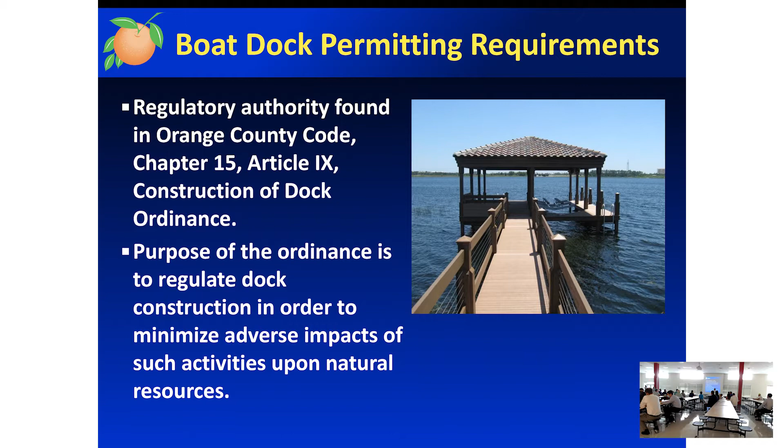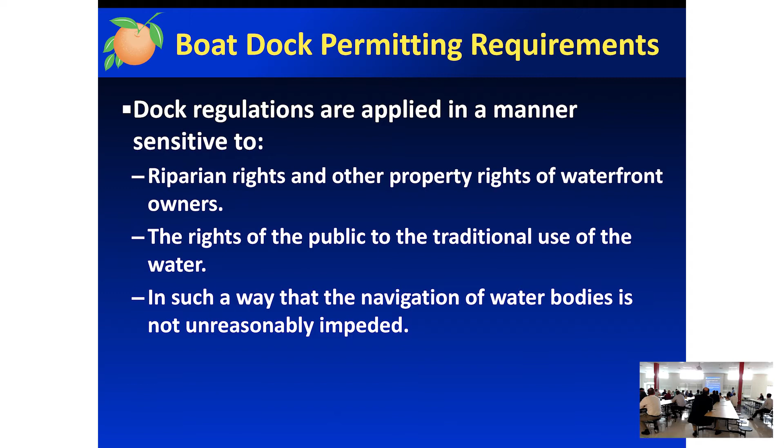We want to make sure people aren't constructing docks that have a negative permanent effect on our lakes. So all of Article 9 is full of regulations applied in a manner sensitive to riparian rights and other property rights of waterfront owners, the rights of the public to traditional use of the water, and so that navigation of water bodies is not unreasonably impeded.

And we have a few criteria - if the clicker will let me go back to it, which it might not. Well, the clicker doesn't want to let me go in reverse, but fundamentally the criteria include...

Regulations on the size of the terminal platform you're allowed to build, based on how much shoreline you own. Also side setback criteria, again based on the amount of shoreline you own - you could have either a 25 or a 10-foot setback allowed. There are restrictions on how high a dock can be built, 12 feet above the deck elevation. And the last criteria is a 1-foot minimum deck level above the normal high elevation, the normal water level of Big Sand Lake, as documented by Public Works in the lake fact sheet.

We have a 1 foot minimum above that. Lee has reported that several people might be confused, believing the dock is underwater because they were required to build it at a certain elevation and then water levels rose. But there's actually no maximum deck level required. A contractor could research historic water levels and build the deck as high as necessary to avoid flood elevation. There's no height restriction, only that it has to be 1 foot above normal height, to prevent people from running into a flooded dock under normal high water conditions.

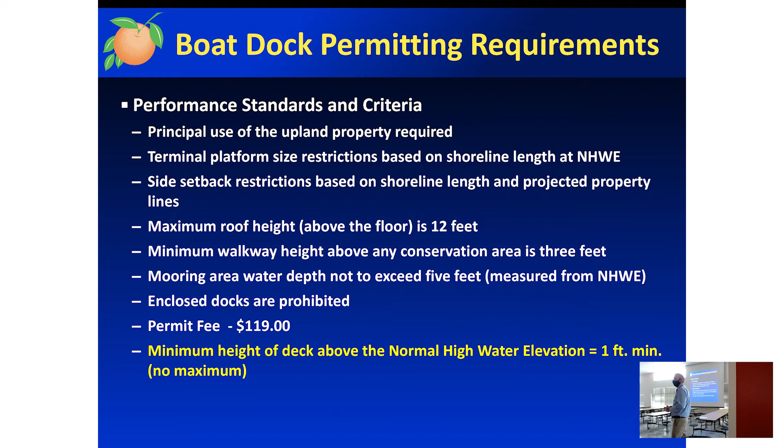This next slide talks about our processes. The first is the waiver process, which only applies to two scenarios: a side setback reduction or a terminal platform increase. For side setbacks, if you want to reduce the setback, you can provide us with a letter of no objection from the affected neighbor on that side. Then the EPO, our manager of the Environmental Protection Division, can administratively approve the waiver. Otherwise, if we don't get that letter, it goes to the Environmental Protection Commission for a hearing, and they make a recommendation to the Board of County Commissioners.

The second scenario in the waiver request process is a terminal platform exceedance. A dock can be 10 times the shoreline length for the first 75 feet of shoreline, and then 5 times for each additional linear foot, not to exceed a total maximum of 1,000 square feet. On those, there is no LONO process. Those waivers are presented to the EPC and ultimately to the BCC in all cases.

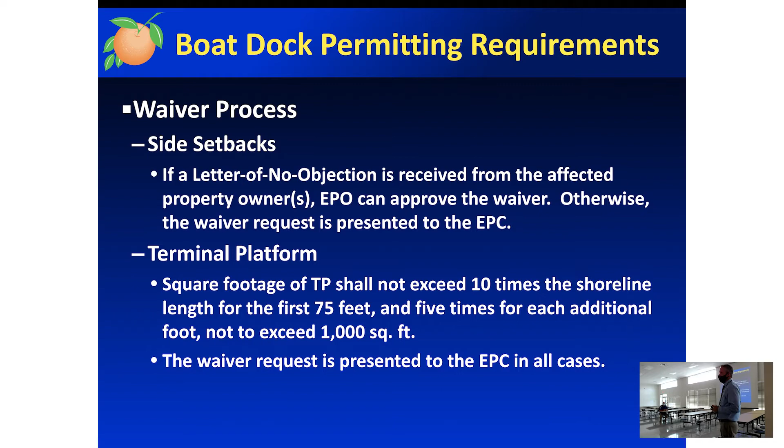The next major process in the code is a variance process, for any deviation from code other than the terminal platform size exceedance and side setback reduction already discussed. Variances have 4 specific criteria to receive approval or approval with conditions: first, the request can't be contrary to the public interest; second, owing to special conditions, compliance with the provisions would impose an unnecessary hardship on the applicant, so you must demonstrate that compliance with the code would impose a hardship; third, the hardship can't be self-imposed; and fourth, granting the variance would not be contrary to the intent and purpose of Article 9.

All variance requests go to the EPC first for a recommendation, then on to the BCC, typically on consent agenda. However, there are some special EPO approvals where they can skip that process, either for ADA (Americans with Disabilities Act) reasons, or sometimes where the variance would actually promote more ecological benefit than compliance with the code—in those cases, the EPO can also approve.

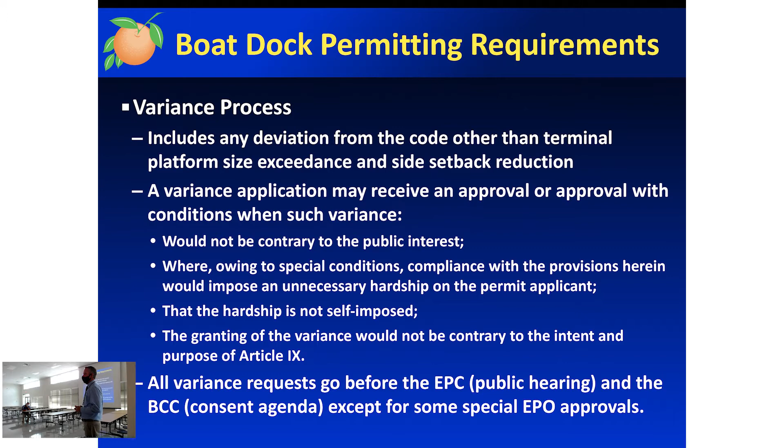Well, no, it doesn't want to go forward either. Let me try, I'm going to try moving positions. There we go.

So this is a floating dock recommendation letter. Since 2016, around when EPD started receiving an increased volume of complaints about docks being underwater, we developed this template letter in our system. Every time a dock application came in for the past 5 years, for Big Sand Lake specifically, we've sent this letter to the applicant and copied their dock contractor, explaining that Big Sand Lake experiences a wide fluctuation in water levels, anywhere from 10 feet below normal high to 10 feet above normal high, and therefore we recommend considering a floating dock design. For the past 5 years, people have gotten that letter.

So if you, your friends, or a neighbor are interested in the status of a boat dock permit, or one issued anytime since 2011 when we built our database, you can Google and go to the Orange County Fast Track Permit Portal. You can search by Big Sand Lake, by street address, or by owner name, and look up any boat dock permit you're interested in, even pending applications still being reviewed.

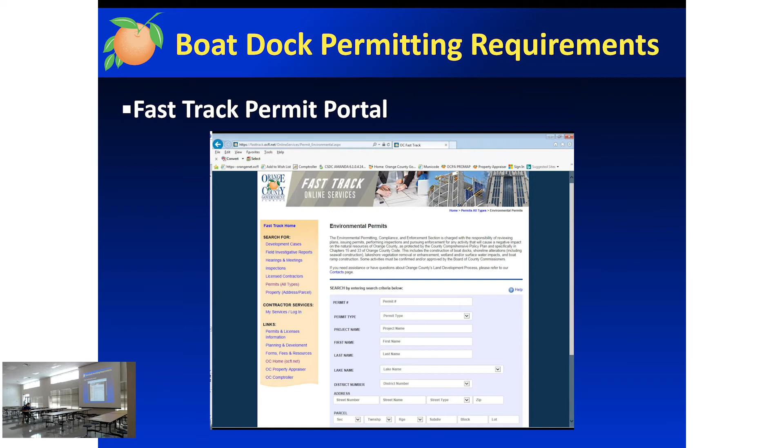The last section on boat docks is that we're currently updating the ordinance. Article 9 was adopted in 1988 and last revised in 2004, so there's a lot of antiquated language we've learned needs addressing through citizen and contractor feedback. We've tried bringing the ordinance forward before, but it sometimes becomes political. Now we have an effort we're very far along with.

The goals of this update include maintaining environmental protections - we don't want to decrease protection of water bodies - decreasing the time it takes to review and obtain a permit, increasing the maximum allowed dock dimensions required by certain portions of the code, and eliminating the waiver process while making it more difficult to obtain a variance.

We're making it easier and eliminating the waiver process if you want to increase your dock over what current code allows, up to a maximum of 1,500 square feet and up to 15 times your linear shoreline length - that process is going to get much easier. What we've built into the draft is that most requests will be captured in the streamlined process, and only the oddballs that are really large would need to go through the variance process, with criteria that are a little more difficult to meet.

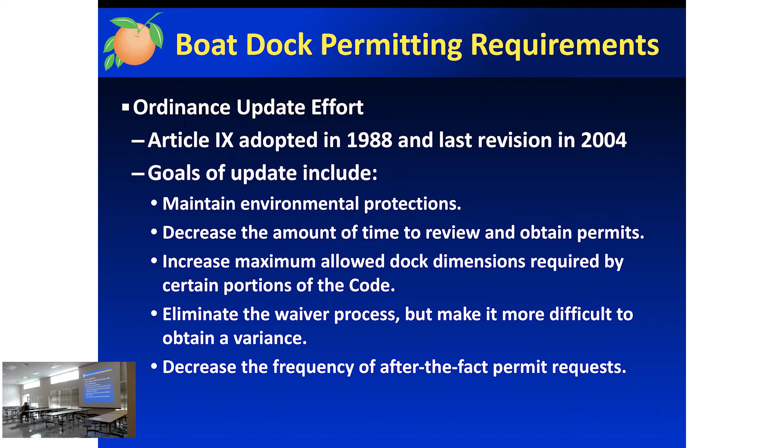The timeline for this effort: we already held two stakeholder meetings on September 15th, one in the early afternoon and one in the evening, and got great feedback from contractors who attended. Next month and in November we'll brief the mayor and commissioners on the ordinance. In January and February we'll brief advisory boards including the Environmental Protection Commission, the Development Advisory Board, and the Land Planning Agency. In March and April we're looking at a BCC work session, and hopefully May or sooner is the adoption hearing for the ordinance.

If you're interested in reading it, this presentation can be made available to you, and there's a link to the draft ordinance on the county calendar. If you have any comments, whether you've read the ordinance or not, you can submit them by email to wetlandpermitting@ocfl.net.

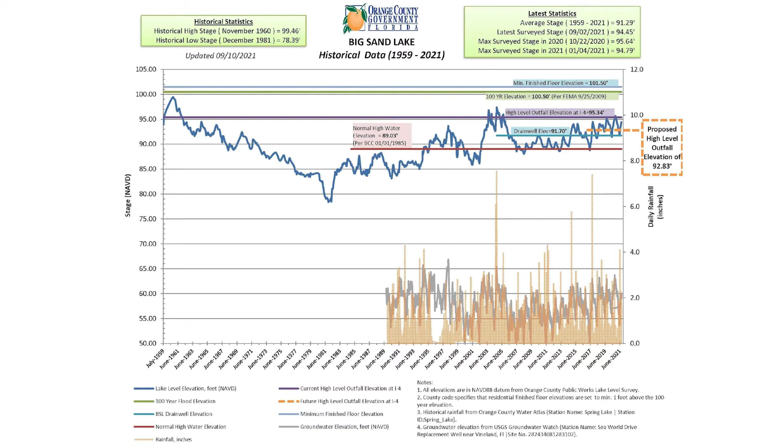I just say that to illustrate that the lake behaves as a landlocked system, with those very large fluctuations.

One thing I also want to point out is although these peaks were quite high, probably higher than most people would like, they were still well below the minimum finished floor elevation of 101.5. None of the peak stages in the last 20 years has been close to anyone's minimum finished floor elevation. Also in 2003, the county was able to work with FDOT and get a drain well installed at elevation 91.7.

And then in 2015, they were able to get another drain well installed also at elevation 91.7. What the drain wells do is they take water into a casing and send it down into the aquifer. It's a 12-inch diameter pipe that goes down, and it provides some volume recovery for the lake to help reduce those higher stages that you see in the lake.

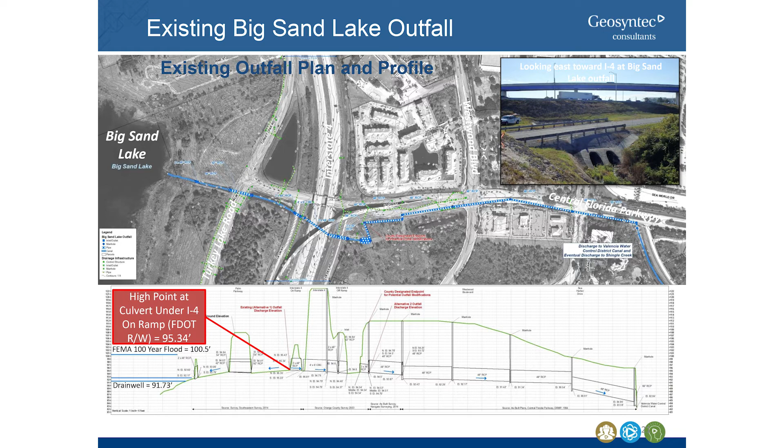If Big Sand Lake reaches 95.34 feet, it starts to overtop this high point in the system and drain east through the system and out towards the Valencia Water Control District. So this is the existing condition, existing outfall of the lake. This is a zoomed in view of that outfall. There's Turkey Lake Road, here's I-4. This is the profile of the pipes and the ditches.

So what is the proposed system? The proposed system would replace the pipes and ditches from Big Sand Lake to Central Florida Parkway with an enclosed storm sewer network. That system would continue to receive runoff from Turkey Lake Road and I-4 as the current system does. But the big benefit for Big Sand Lake is the high point in this system would be 92.83 feet, which is 2.51 feet lower than the current outfall.

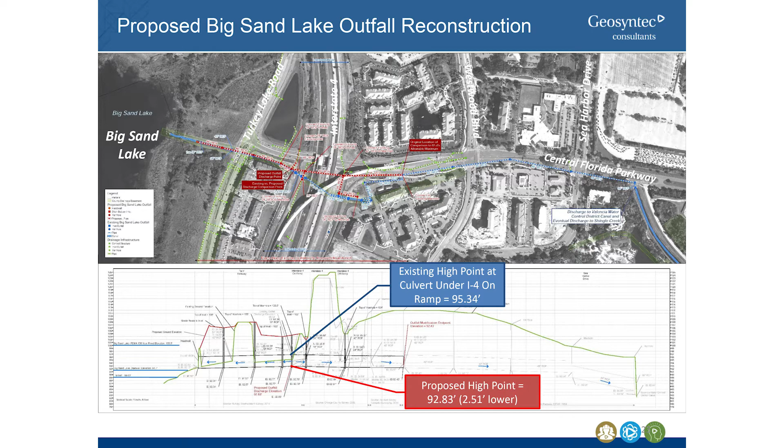This is a zoomed in view of that profile, the proposed profile versus the existing one. So you have a 2.5 foot lower system.

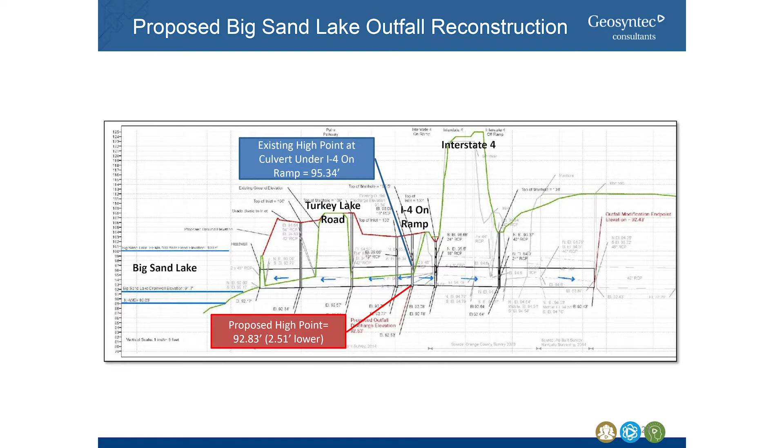Going back to the historical map, I'm going to go to the 20-year one. Because of the county's proactive efforts and coordination with the DOT, this system has already been designed and permitted through the St. Johns River Water Management District and the Valencia Water Control District. So the next step is just construction, and it will be constructed as part of the DOT's Beyond the Ultimate project when that is constructed.

That is for DOT to divulge that information later. I believe so, yes. What is it about? If you'll let me finish, I'm sure they'll discuss it. I've been waiting a number of years for this. Is it next week? Is it 2022 or 2023? We're looking at 2022, sir. There you go, 2022. I'm from DOT. Okay, there you go, okay, so 2022.

Another question you may have is how much additional flow or benefit will this outfall provide? For comparison, the drain wells, when flowing at their maximum rate, can handle about 1,300 gallons per minute leaving the lake down the well. The proposed outfall, when flowing full, will provide 10,000 gallons per minute of additional outflow, which is the equivalent of about seven times the existing drain wells, or adding about 14 more drain wells to the lake.

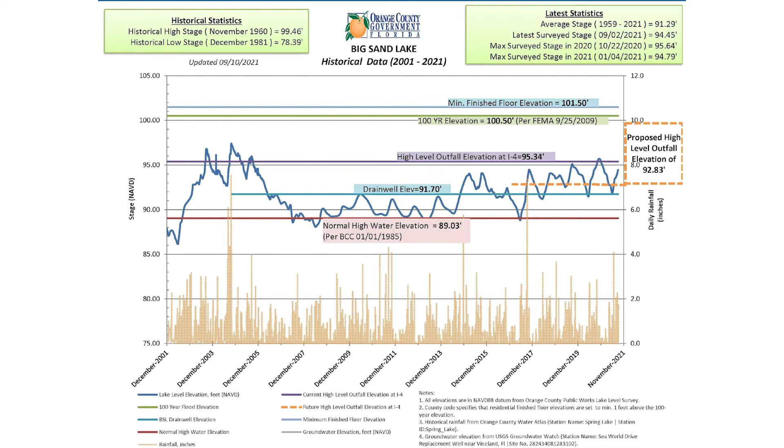And with that, I think I'll pass the baton over to the DOT. Is it this one? This is the laser pointer, and this is the next. Okay, thank you. Oh, I'm sorry? Oh, they've got a switch. Oh, okay, there you go. Yeah, oh yeah, okay, gotcha.

Hello everyone, my name is Su Hao. I'm from... I'm sorry? Louder. Okay, I'm trying to be as loud as I can. I don't have a loud voice.

My name is Su Hao, and I'm from FDOT. I'm here to give you an update on I-4 Beyond the Ultimate and the projects that we have coming up going to construction in this area in the near future.

I can pull it from here. Or... Oh, there we go, okay.

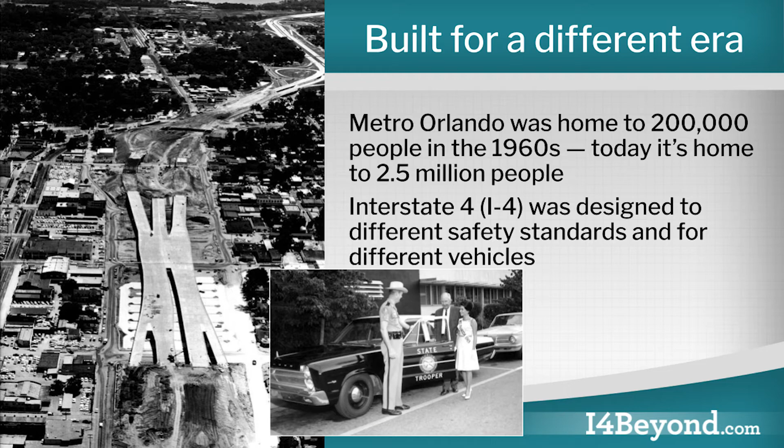So why are we reconstructing I-4? Well, the original I-4 was built back in the 1960s, and since then there has been a lot of development. Today it's home to more than 2.5 million people. Since then, vehicle and safety standards have also substantially changed. That's why we've had to rebuild I-4 several times throughout its life, and we have the I-4 Ultimate project that's going on in construction right now.

The goals of the I-4 Beyond the Ultimate project are to increase safety, increase mobility and ease congestion, increase connectivity among Central Florida communities, and support the region's economy and lifestyle long into the future.

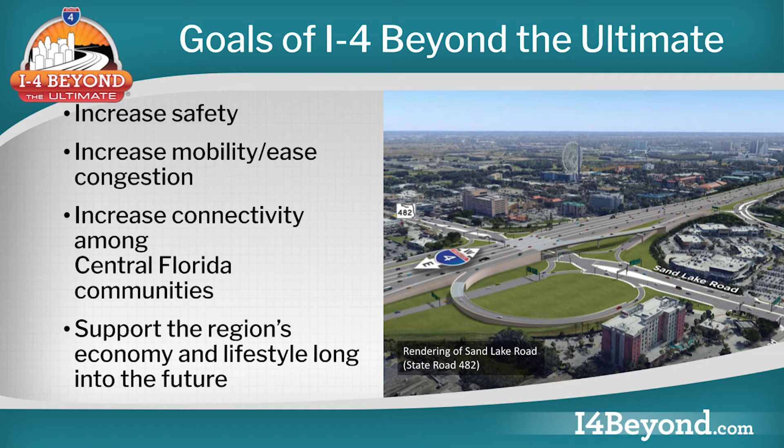I'm gonna go back. Is there a way to go back? At least we can get to go back earlier. Okay, so anyway, I'll continue.

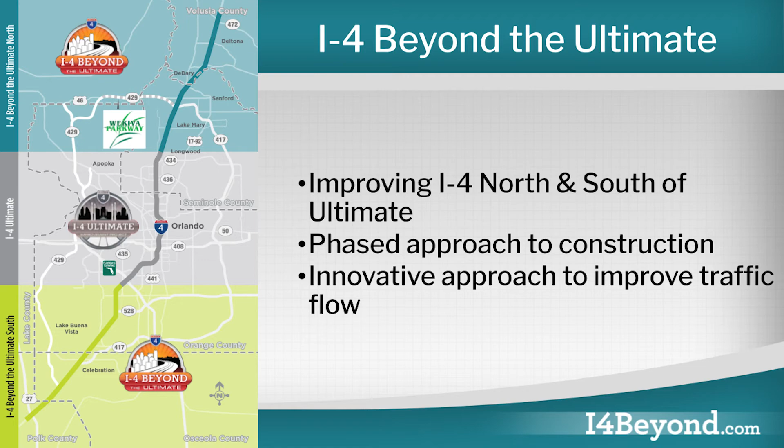For the I-4 Beyond the Ultimate project, we are extending that from the I-4 Ultimate limits. What we are doing is looking to prioritize critical areas that have the highest amount of needs. With that in mind, we are looking to construct some critical projects to address the areas that are needed the most. Here are some projects that we have going to construction or in construction right now.

The first one is the I-4 at Champions Gate project down in Osceola County. As you might know, that area gets backed up a lot, so that just went into construction this past summer. It'll be converting the existing interchange into a diverging diamond interchange, which I'll get to in a moment.

The other two projects we have are the I-4 at Daryl Carter Parkway project and the I-4 at Sand Lake Road project. Both of these projects will be converting the existing interchange or overpass into a diverging diamond, and they will be going to construction in the spring and summer of 2022.

For the Sand Lake project, as mentioned previously, we are converting that into a diverging diamond. A diverging diamond interchange has several advantages over a traditional type of interchange, the most important of which is that it removes left turns across oncoming traffic. That improves safety and cuts down on the number of traffic signal phases, which lessens the amount of time vehicles need to spend waiting at a signal.

Another key feature of the Sand Lake Road project is the removal of the left turn from westbound Sand Lake Road to Turkey Lake Road. When I was driving here today, I was pretty backed up getting off the exit from westbound I-4 to Sand Lake Road, and I'm sure a lot of people here have witnessed the same thing. That exit gets a lot of traffic because vehicles are trying to turn left onto Turkey Lake Road, and that turn gets backed up a lot.

So what we are doing is that we are putting in... this will work for me. Is there a way to control this? Okay.

So what we're doing is putting in this loop ramp. This loop ramp creates direct access for vehicles traveling on westbound Sand Lake Road to get to Turkey Lake Road, and it also gives direct access from I-4 to Turkey Lake Road. That takes a lot of vehicles who would typically use the Sand Lake Road exit and gives them their own exit onto Turkey Lake Road, diverting traffic away from this exit and hopefully easing congestion on the I-4 main line as well.

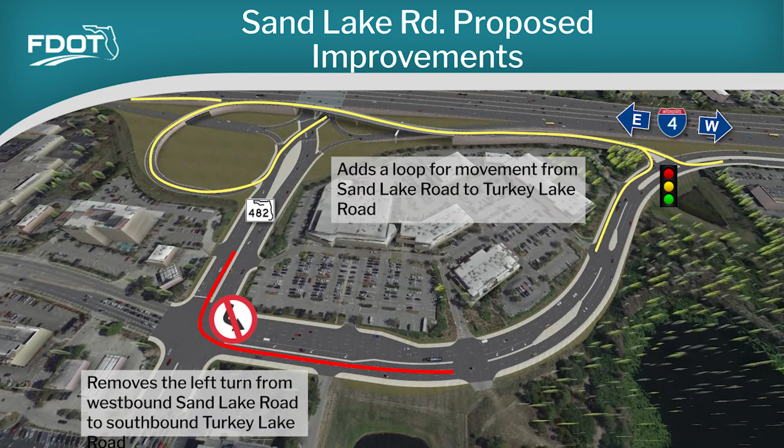Oh, okay. Yeah. Would this work better? Or do you want to click?

Okay, yeah, thank you. Quick question, how do you merge those two traffic flows, the I-4 and people that take the loop ramp?

Great question. There will be very good signage out there, and we will set up the lanes so that the lanes coming off of I-4 will have their own separate lane as it approaches the loop ramp.

As mentioned previously, we are looking to prioritize critical areas utilizing the funding that may become available. As part of that, the I-4 Ultimate Express lanes are expected to open by early 2022. If funding becomes available, we want to look at possibly extending the express lanes south towards Disney, and we were looking at various options like managed lanes, truck-only lanes, HOV lanes, that sort of thing.

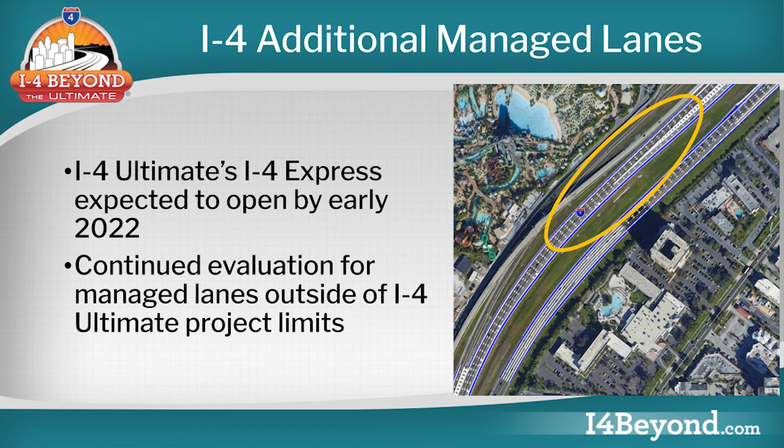The I-4 Daryl Carter Parkway project is going to convert the existing overpass into a diverging diamond interchange. Three of the legs of the interchange will be built with this project under construction in 2022, with the fourth leg being constructed at a later time when funding becomes available.

As part of this project, as Mr. Amstad mentioned, we are also going to be building the Big Sand Lake outfall on behalf of Orange County. The county did design the project, so all FDOT is doing is taking over the construction of that project and doing it for Orange County.

Another project we have is the Champions Gate interchange project. For that one, much of the same: we're converting the existing interchange into a diverging diamond. Osceola County is the one that designed this project, and we are overseeing its construction.

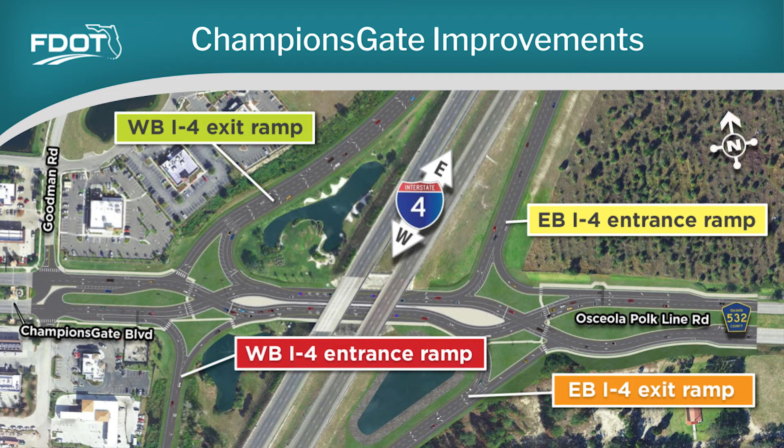As part of this project, we are also going to be widening the ramps to the interchange to help create more storage for vehicles and help ease traffic flow.

Another project we have is a more minor one: we're going to be adding eastbound and westbound auxiliary lanes on I-4 from Champions Gate to State Road 429, adding an additional lane to help with traffic flow down there. We're also going to be milling and resurfacing I-4 from the Polk Osceola County line to State Road 417.

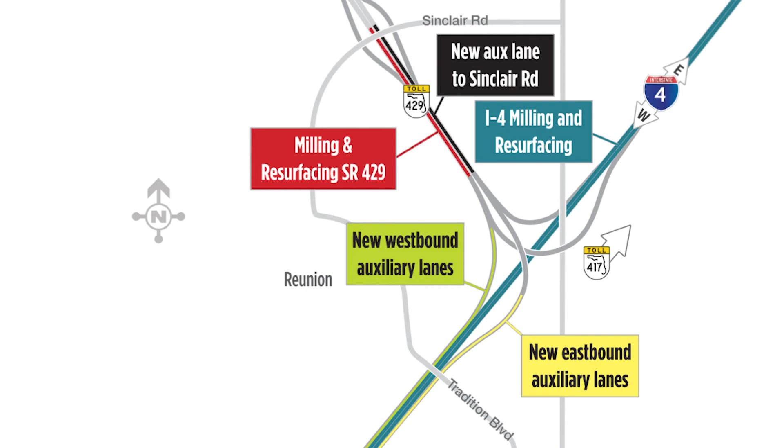So now I'm going to talk more about diverging diamond interchanges. As mentioned previously, the main advantage is that it eliminates left turns across oncoming traffic. It does that by shifting traffic to the left side of the road as it goes through the interchange. That allows vehicles looking to get onto the interstate to make a left turn directly without having to go through a traffic signal, which reduces the number of traffic signal phases and improves congestion for the whole interchange.

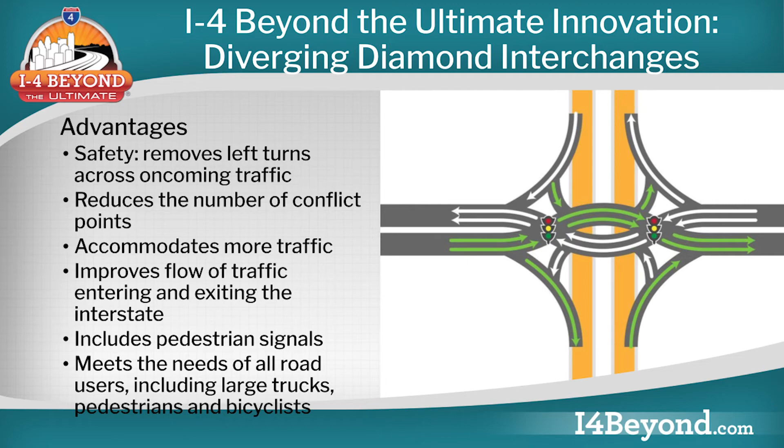This shows how a diverging diamond interchange works. I'll go through them one by one.

To go through an interchange, you basically just follow the path of the lane. On the left side of the screen, there will be a traffic signal. When the signal turns green, you just follow the lane through the interchange, and it'll cross you over to the left side of the road. Then you keep going, and there will be another traffic signal before it crosses back over to the right side of the road.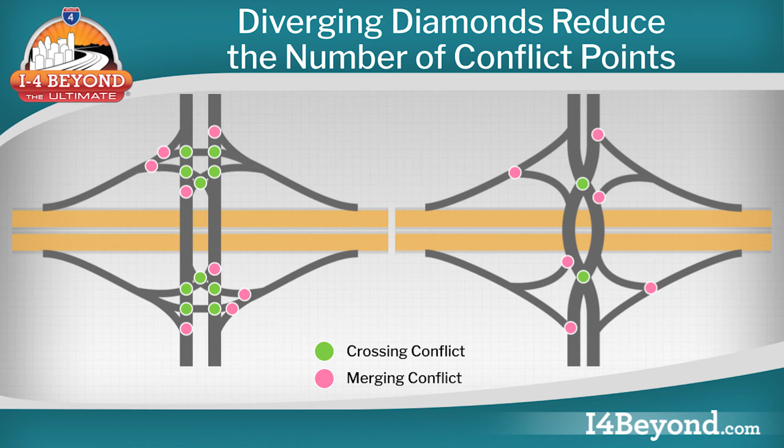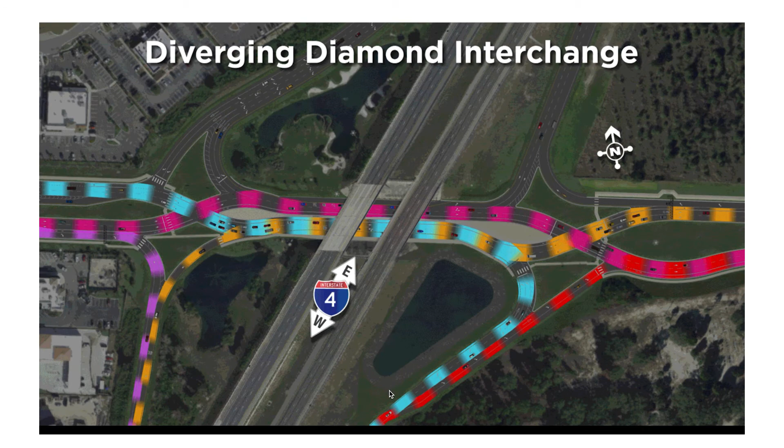So then how do you take a left to get onto the interstate? That's where the diverging diamond interchange advantage comes in. First you go straight through the traffic signal, and the lane will pass you to the left side of the road. Then, before crossing to the end of the interchange, you simply take a left onto the on-ramp.

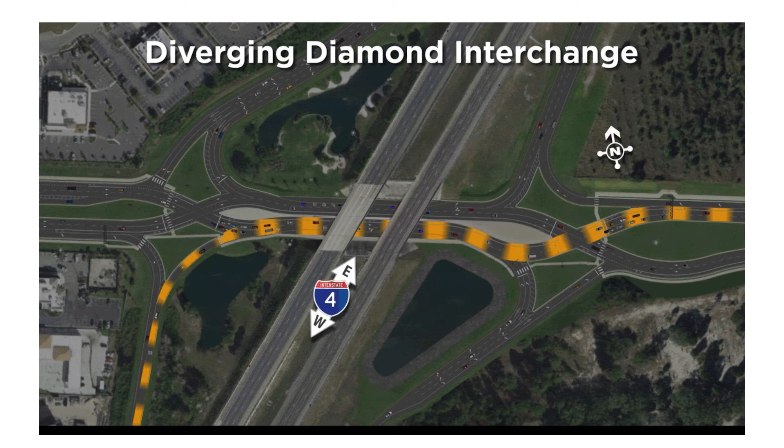If you're trying to take a left onto the side street coming off the interchange, you just stay in the left side of the lane, and when the traffic is free and it allows, you take a left turn, and that will cross you back to the right side of the road.

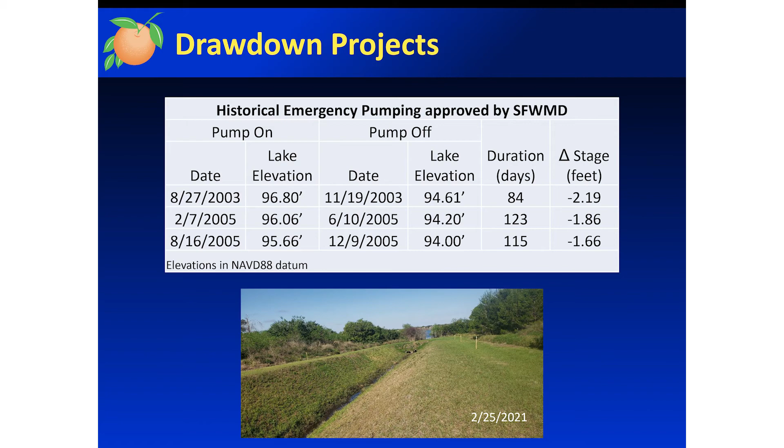I work for Orange County Environmental Protection Division, and I'll be discussing some of the drawdown projects that have been done in the past and one that we're currently working on. There have been drawdowns on the lake: one was done in 2003, and then 2 pumping events were done in 2005. This shows information about when the pumps were turned on and off, the dates, lake elevation, duration, and the change in stage. The photo at the bottom is what the outfall currently looks like now.

From June 2002 to August 2003, Big Sand Lake water level rose 8.03 feet. On August 9th, 2003, the berm between Little Sand Lake and Big Sand Lake washed out, and the elevation in Little Sand Lake was 5.74 feet higher than Big Sand Lake. In addition, an outfall pipe under FDOT jurisdiction was clogged. Based on these factors, the Water Management District issued an order on August 21st, 2003 for the drawdown, and the pumping lowered the lake from 96.80 to 94.61 feet.

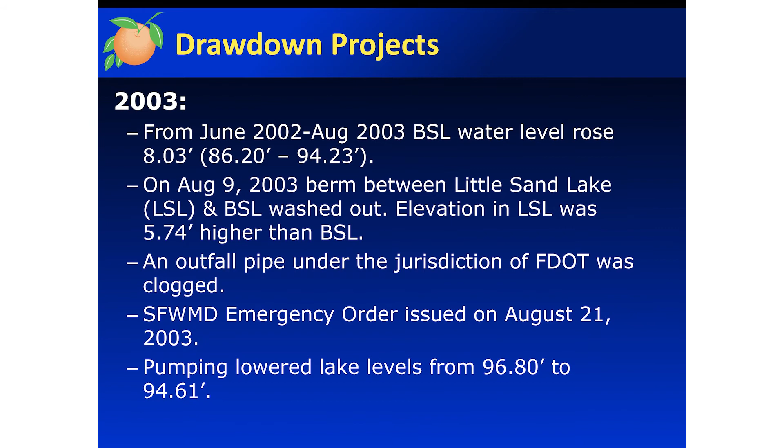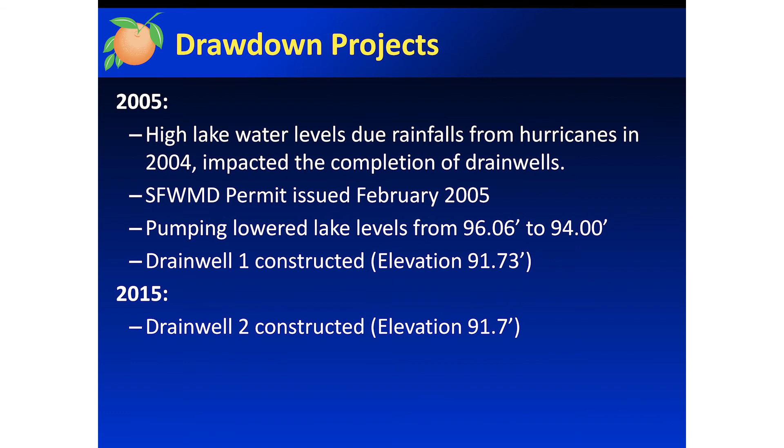In 2005, high water levels due to hurricanes in 2004 impacted the completion of drain wells that Tom mentioned before. The Water Management District issued a permit in February 2005, and the water was lowered from 96.06 feet to 94 feet, which facilitated completion of the drain wells. The first one in 2005 at an elevation of 91.73 feet, and then the next one was done 10 years later in 2015 at 91.7 feet.

On September 30th, 2020, the Big Sand Lake Advisory Board approved up to $500,000 of MSTU funds to pump Big Sand Lake. For the current scope, we had Geosyntec perform an analysis, and based on their design, 2 pumps with a combined discharge of 22.2 cubic feet per second would pump 7 days a week, 24 hours a day, to a maximum lake elevation of 92.83. The conditions would be monitored daily.

However, the current status is that the owner of the property where we would need to stage the pumps and fuel tanks, we're awaiting approval from them for a right of entry. We started that process in February of 2021.

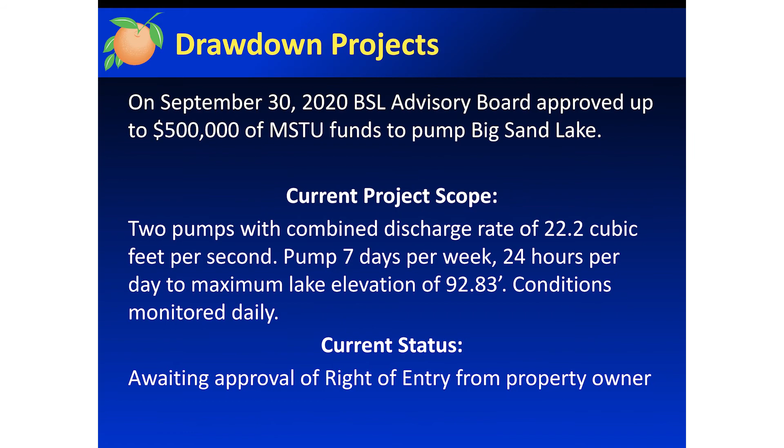The right of entry was sent to the owner in May, and they replied in August, on August 31st, 2021. We sent them just a standard one-page right of entry document, and they returned several pages back in revisions. So our county attorney is working with their attorney to get that approved, and we will not be able to start this process without having the property owner's authorization to be on their property.

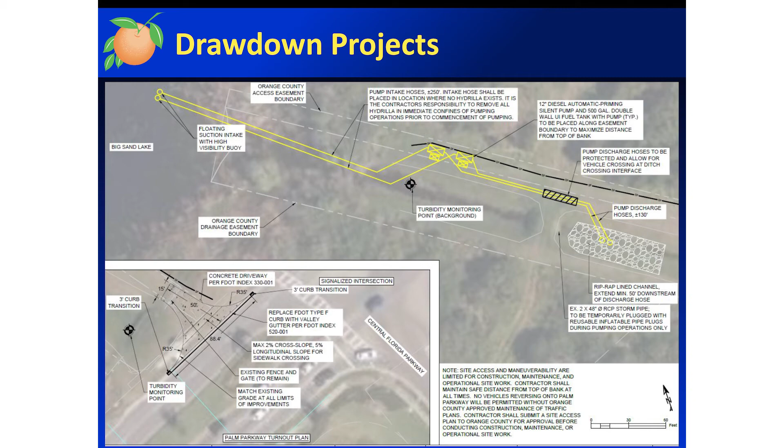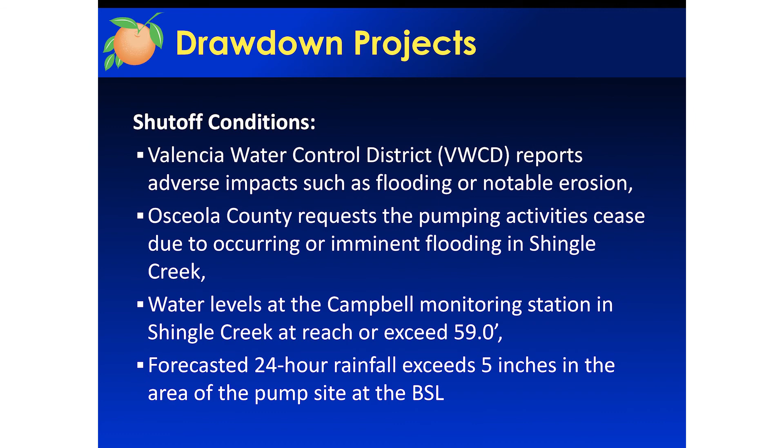There are some shut-off conditions, so if any of these are met, the pumps would have to be turned off: the Valencia Water Control District reporting adverse impacts such as flooding or notable erosion, Osceola County requesting that the pumping activity cease due to occurring or imminent flooding in Shingle Creek, water levels at the Campbell Monitoring Station in Shingle Creek reaching or exceeding 59 feet, and a forecasted 24-hour rainfall exceeding 5 inches in the area of the pump site at Big Sand Lake.

If the water levels are below the elevation of 92.83, which is also the same elevation of that proposed outfall pipe, if water levels in Shingle Creek are at an elevation of 77.61 at Structure 102 in the C1 canal, and if there are any downstream increases in turbidity beyond the acceptable 29 NTU above background, the pumps would also shut off.

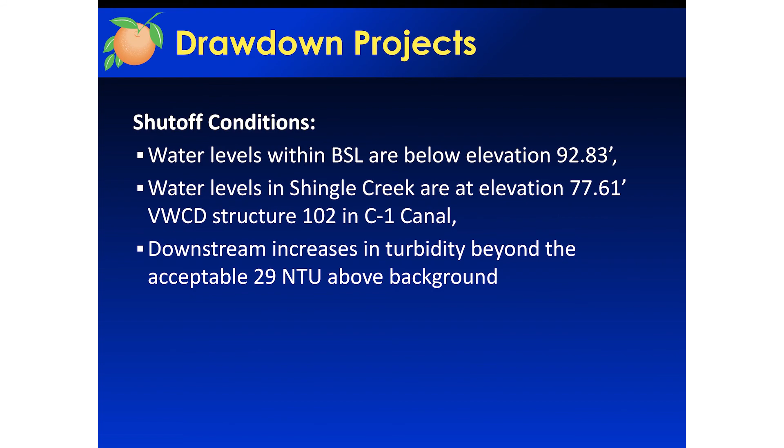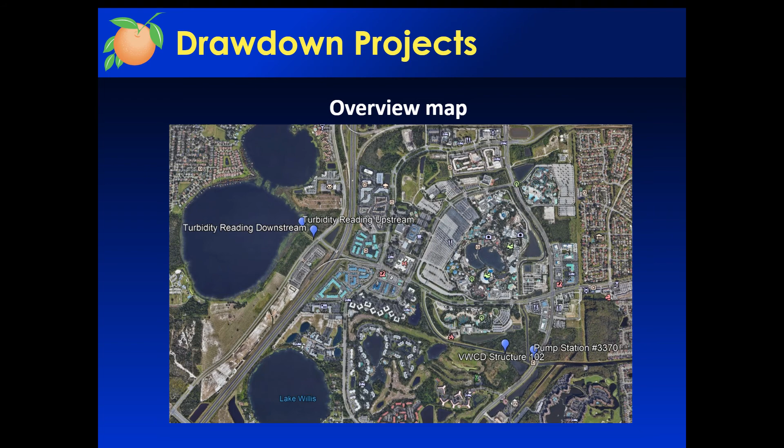So this is an overview map. Here's the outfall, and the Valencia Water Control structure is out over here. This is International Drive, so all this would be monitored on a daily basis. Here is the staff gauge, where we would measure the elevation of the lake on that day. This is the upstream turbidity, and downstream here is where we'd measure the turbidity.

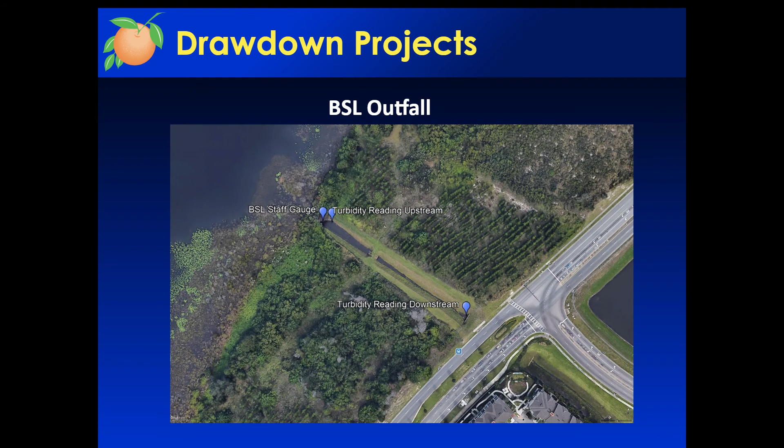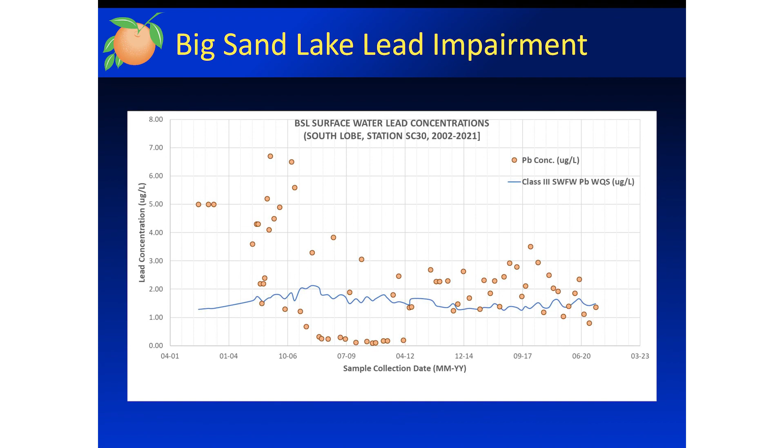So what Orange County is going to do is look at a site here, and this is the southern lobe.

Historically, from 1970 to the mid-90s or so, there was a skeet and trap range here, and shooters would line up in these kiosks and fire out across the lake at the skeet and the traps.

The Florida Department of Environmental Protection came in, and with the county, did a cleanup in the 80s and early 90s. The site was issued a site rehabilitation completion order saying all of the land sources were cleaned up of lead. However, what we're seeing out here is concentrations of lead, like I showed you on the previous graph, that exceed standards.

As Nydia mentioned, the county goes out there on a quarterly basis and grabs samples, kind of mid-lake in this area, and reports that up to DEP. DEP looked at the data and said, look, if we think you've got a problem with lead out there, we want you to address it.

So what EPD Water Sciences is going to do, through our consultants, is go ahead and take samples of water on a monthly basis and of muck, unconsolidated sediments. Muck is kind of like lawn clippings and leaves that get blown off the surface down into the storm drains and onto the lake. It's that gelatinous layer of unconsolidated sediment that can be a repository for nutrients that are released, and we're going to look and see if there's some lead in there.

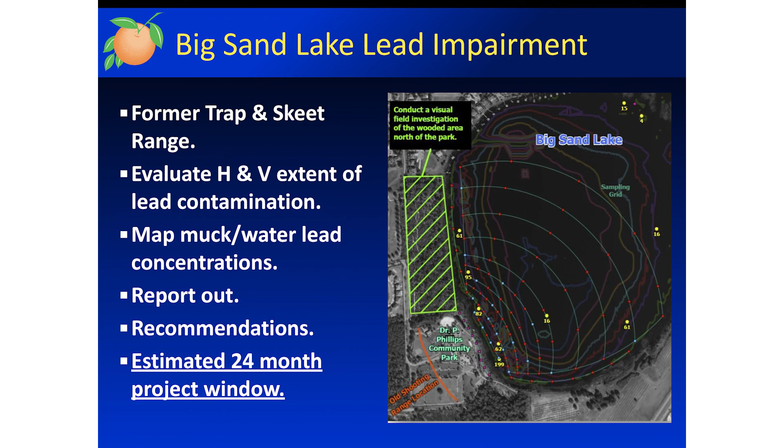And of course, these reports we post to the Orange County Water Atlas, which you can Google and see. All right, and that's it from Water Sciences.